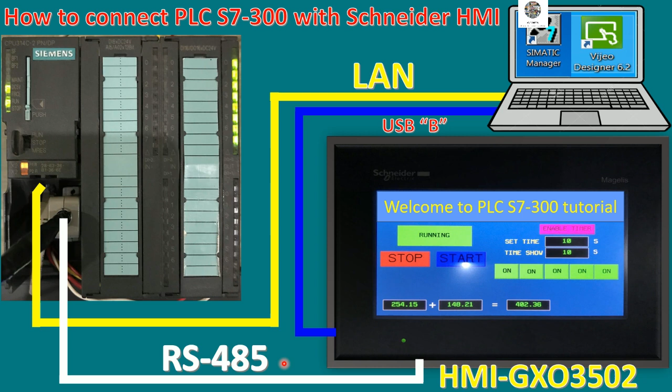Okay. And in this section also, I will use Simatic Manager for the PLC project and Vijeo Designer version 6.2 to create the project for the HMI. Okay. So before going to create the sample project for test, I would like to explain how to assign the pins for the PLC and for the HMI by using RS485 for communication. Okay, so let's go.

So here is the PLC part. We will use the male RS485 connector, and we use a resistance connected from pin number 6, 390 ohm, in series with pin number 8 with the resistance 110 ohms, and we will connect pin number 5 in parallel with pin number 8 with a resistance of 390 ohms also.

And for the HMI connection side, we can connect pin number 6 with number 7. We can weld them, yes. Number 4 with number 8. Number 1 connects with a resistance in parallel, or connects with pin number 2 with the resistance 110 ohms.

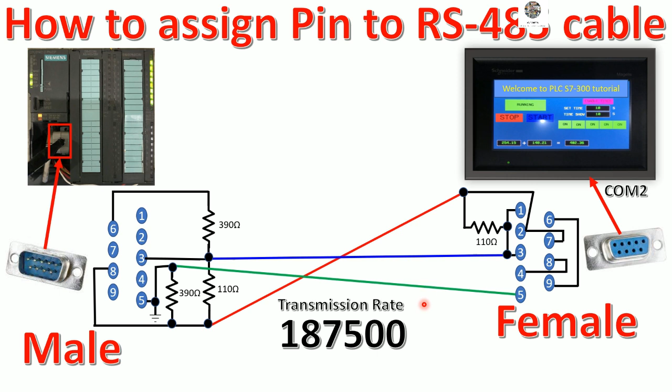So this is the main objective of this video, because we need to know how to wire the connection between PLC and HMI, otherwise we cannot test. Okay, so everyone can follow this drawing. For the resistance, it is not fixed at 390 ohm or 110 ohm. We can use similar resistances, so we can test also.

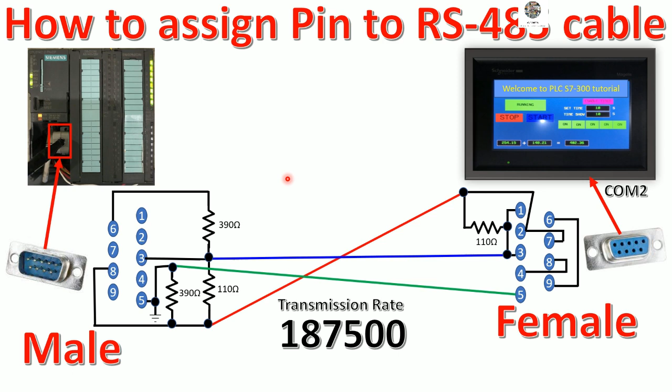So now let's go to our software to create the new project to test with the data from the HMI and PLC. Okay, so let's go. We will use Simatic Manager and Vijeo Designer that I already installed on my PC. So I will create the new project, S7-300 connect with Schneider HMI.

Okay, so first we will create the new project in Simatic Manager. So open Simatic Manager. Right now I use version 5.6. Okay, so create the new project. I will name the project Schneider HMI and browse to find the folder that we already created on the desktop. So here, and then click OK.

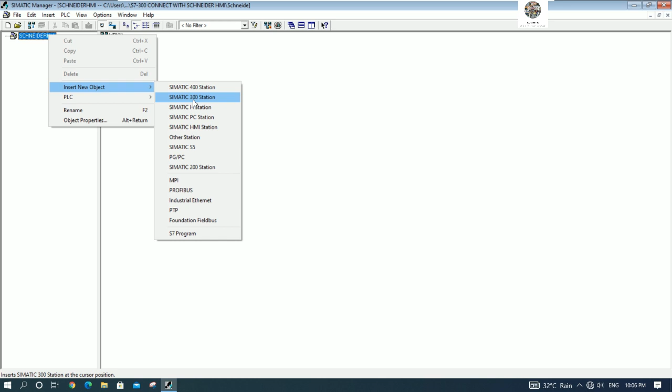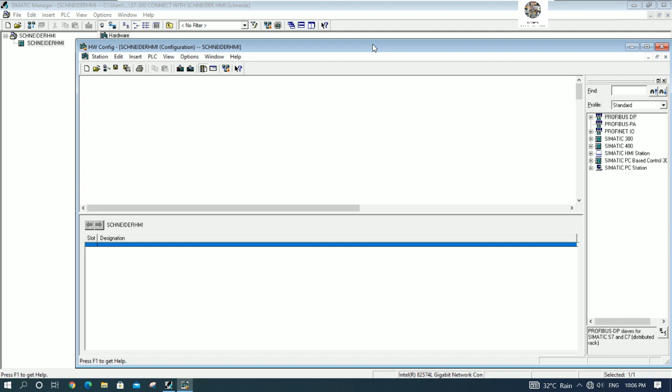And we will insert the hardware configuration for the CPU. In my slide, I will use the CPU 314C-2 PN/DP. It has two Profinet ports and one port for Profibus. So we can insert the Simatic 300 station. Okay, Schneider HMI. And then we can insert the rack for Simatic S7-300. So I will create the rack.

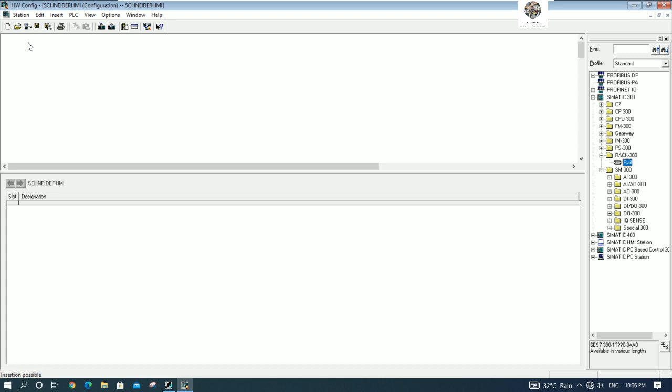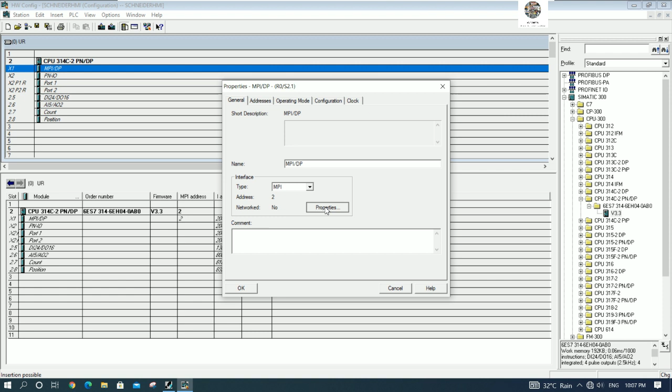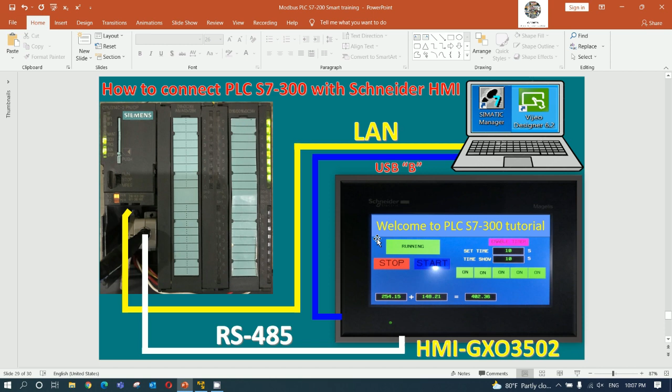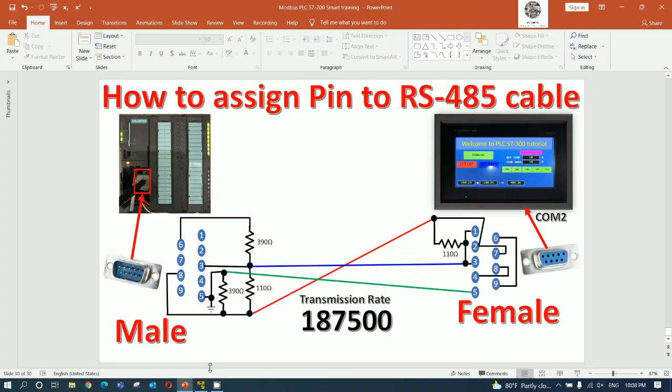And then we will insert the CPU to match our hardware. So 314C-2 PN/DP version 3.3. Okay. So this is the IP address of the CPU. So click OK. And here we must use MPI because we connect with the HMI. Properties. Let's see here. 187.5 kbps. It is the transmission rate that I already explained in the slide. So we need to choose the transmission rate the same as the PLC port.

So this is the address. It will be created automatically. Anyway, we can change the address here also. For example, we can change it to start from I0. So it will start from I0.0. And for the output, we can also change to 0.0. So it will start from I0.0 until 2.7 and output Q0.0 until 1.7.

And then save and compile the project, and we need to download the project to the PLC, right? Download the hardware configuration. So I will connect the LAN cable from my PC to the PLC, and then you can check the IP address here, 192.168.0.1. So let's put the IP address of our computer. Maybe I put it already, right? Let's check.

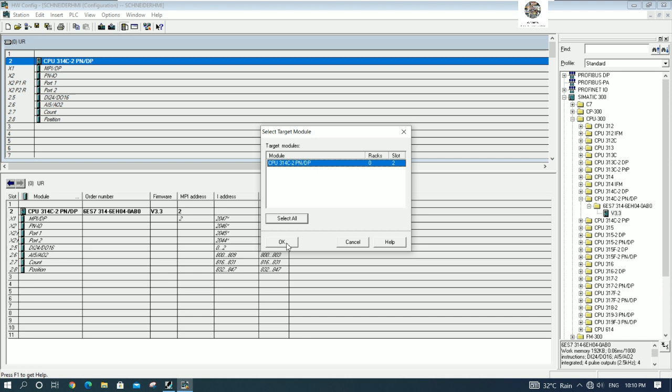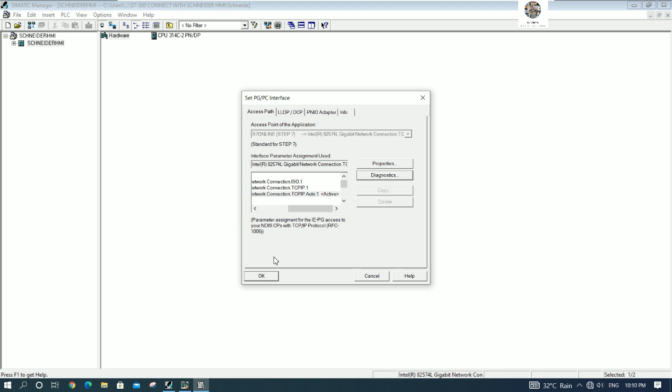So before download, we can go to Set PG/PC Interface. So make sure we select the connection here, and then we can test. Okay, it works. And then let's go to download. So it will find the CPU automatically, scan between PC and CPU.

So wait a moment for scanning the address of CPU, and it will automatically detect when the PC detects the PLC. Okay, so right now it detects one CPU that has IP address 192.168.0.1. So click View to view the status of the CPU, yes, and then click OK to download.

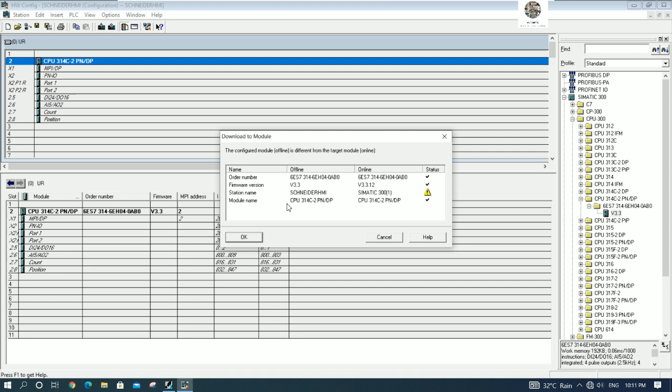Click OK to confirm, and OK one more time to stop the CPU. And right now the CPU is stopped and download is complete, so we click yes to restart the CPU, and the CPU is running right now. And then we can create the sample logic to test with our HMI.

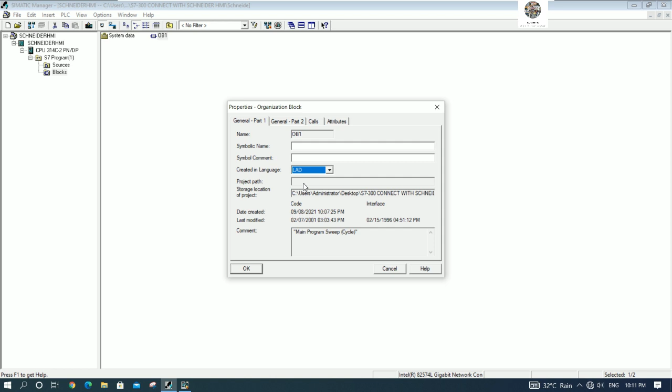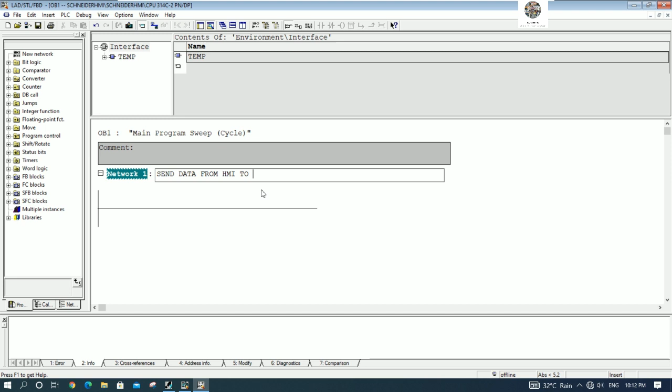So I will go to OB1, I will choose ladder, okay, so we can comment, send data from HMI to PLC. So we can create the push button stop, push button start, and output.

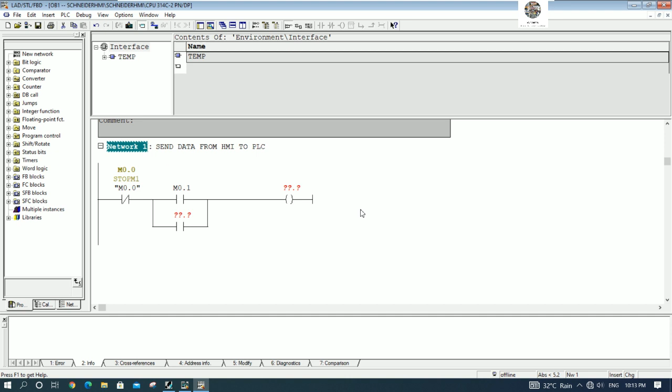Yes, and here I will use M0.0, edit symbol, example stop M1, yes, M0.1, example start M1.

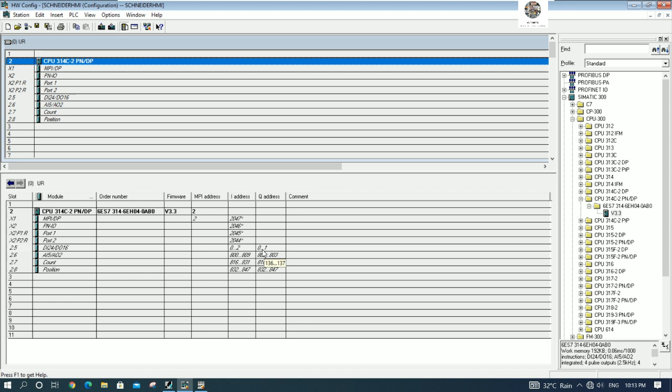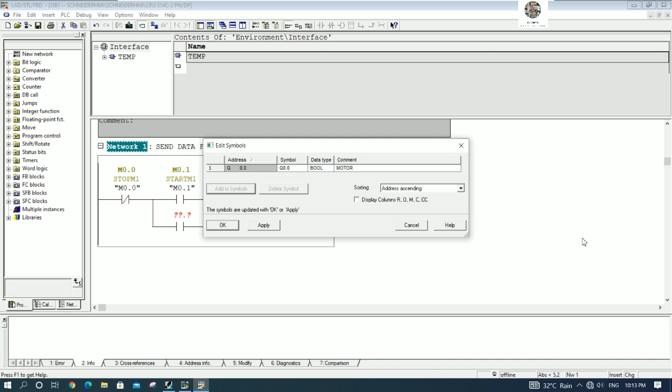And I will turn on the output. So output we already changed from Q0.0, Q0.0, so relay 1, or motor 1. Okay, and I will hold signal by Q0.0.

So we can save the project and then download to the PLC, and we can go online. Okay, so we can go to Vijeo Designer to create the HMI and then download, and we will test with the PLC. So let's go to Vijeo Designer. So double click to open.

Okay, so we will create a new project. The project name I will put PLC S7-300 connection. So we can copy from here and paste,

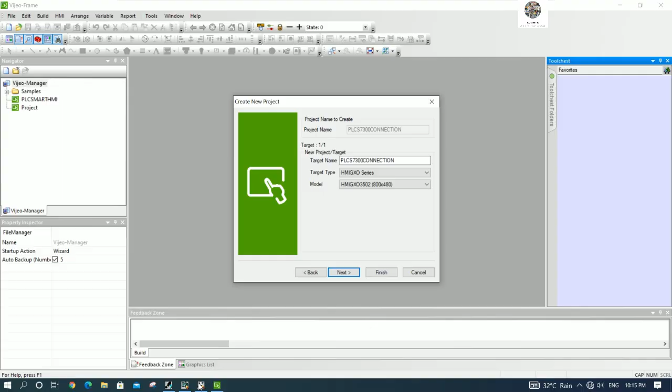and we will choose the correct model of HMI. Yes, there are many models, so I will use HMI GXO and choose GXO3502, the same as our HMI. Yes, so click next again, and add the driver of PLC.

So I will choose Siemens AG and choose the Simatic S7 MPI/PPI. So in the previous video we learned already about S7-200 series. So right now I will use S7-300/400 series. Okay, and then I will change the background of screen to this color. Yes,

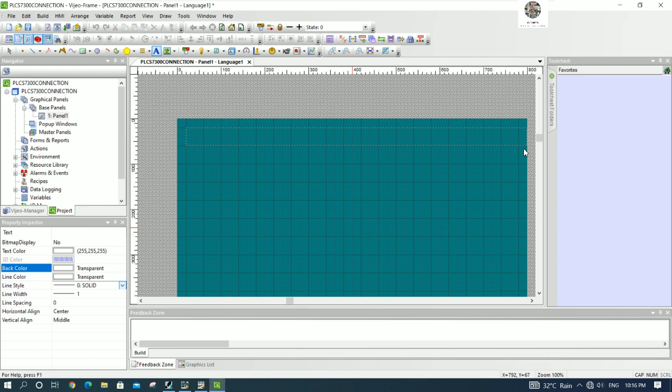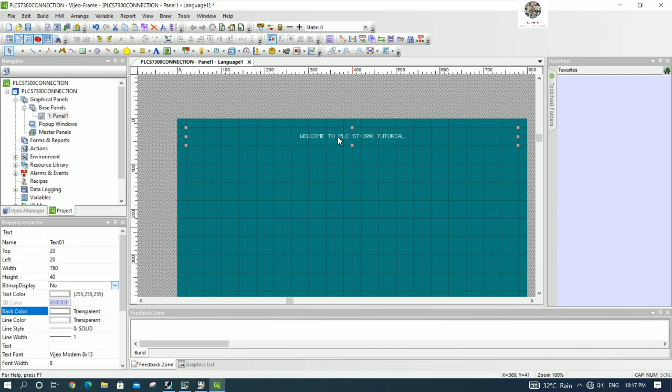and then I will put the text. Okay, welcome to PLC S7-300 tutorial. Okay, then I will use the font size to be this size. I will use bold. Yes.

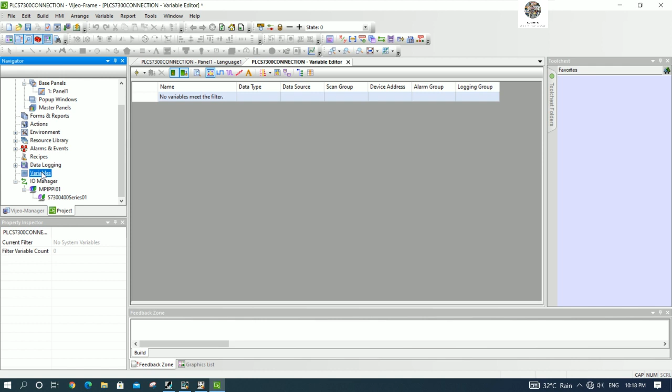And we will create the variables to connect with the PLC, right? So M0.0 is stop, M0.1 is start. So we can use variable, create the new variable and boolean. Example, stop relay 1. And this is a driver. Yes, so we can choose, and here we can choose M0.0, it is stop, right?

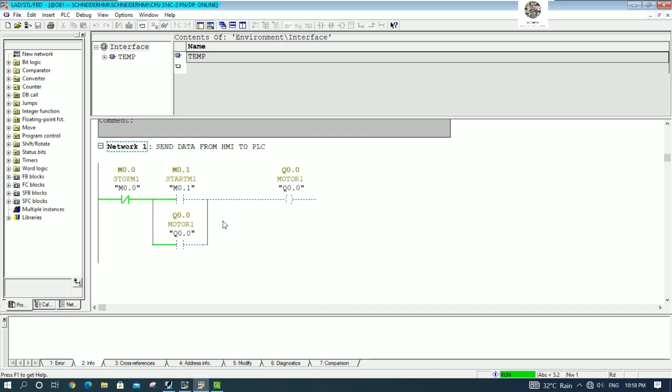And insert one more for start relay 1. M0.1. Yes, it is like this, the same as the address of PLC, right? And one more boolean for relay 1 status or motor 1 status, right? So I will put relay 1 status. So Q0.0, yes.

And then don't forget to check the transmission rate, yes, it's correct. And we'll connect to COM port 2, RS485 for serial interface. You can save the project and then go to the screen and configure the screen, right? So I will use switch.

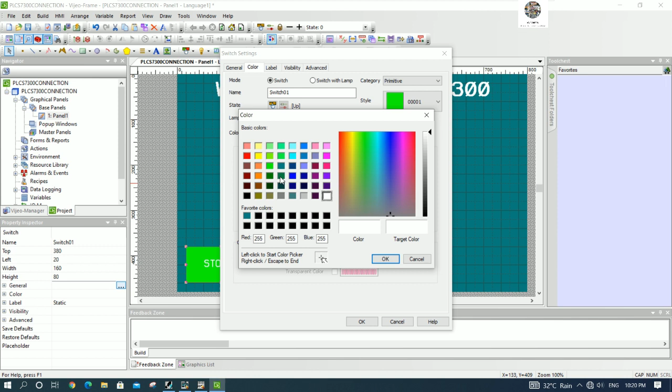Okay, I will put the stop button, stop R1. Okay, stop R1. And I will change the text color to be black and change the color to be red to fill the button. Okay, stop R1.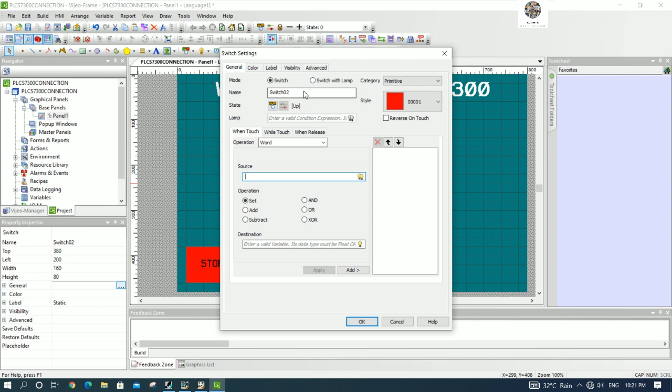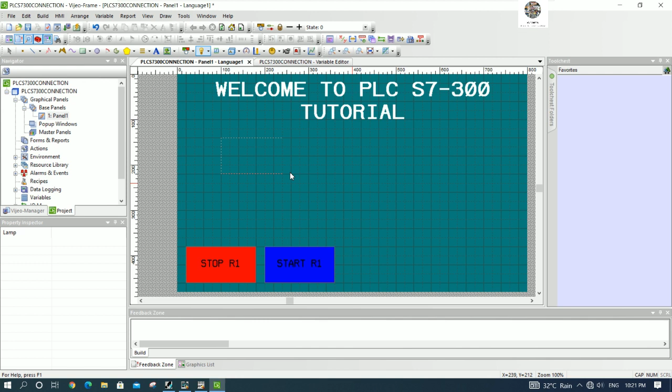And we have to copy to start R1. Okay, this one should be start R1. And then we will change the color to be blue. Yes. And we need to insert the relay number 1, right? So I will insert the relay number 1.

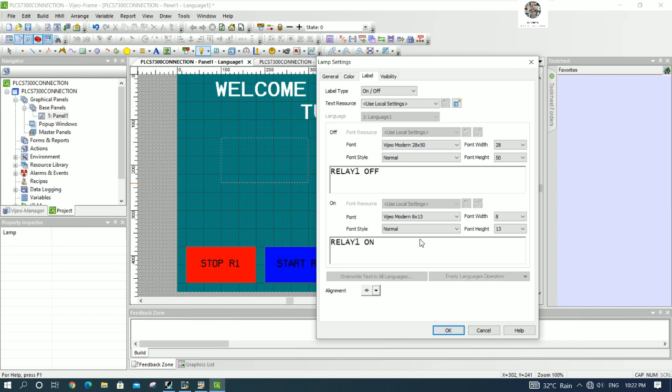Okay, we can use on off like this. So when the condition is off, I will write relay 1 off. And when it is on, I will put relay 1 on. And for the font size, we can use the font size. And then we can use the style like this. Yes.

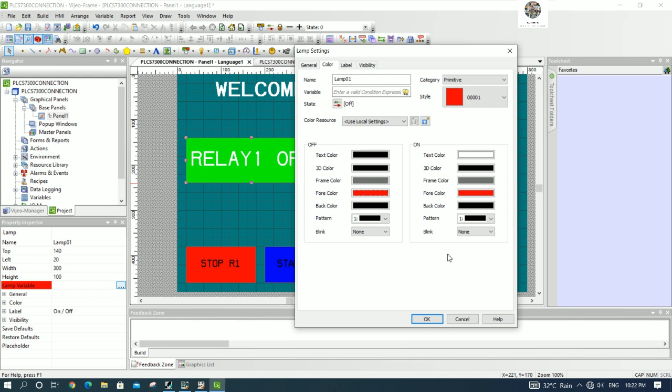Okay. So if we would like to turn on another relay, we can copy. So right click, copy, right click, paste. And then we can adjust the alignment. So I will change this one to be relay 2. This one should be stop relay 2, stop R2. This one start R2.

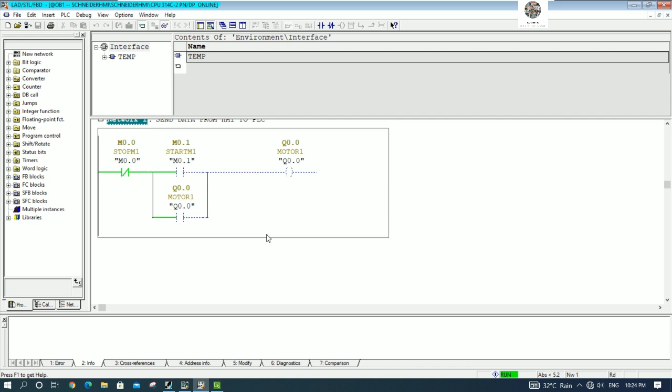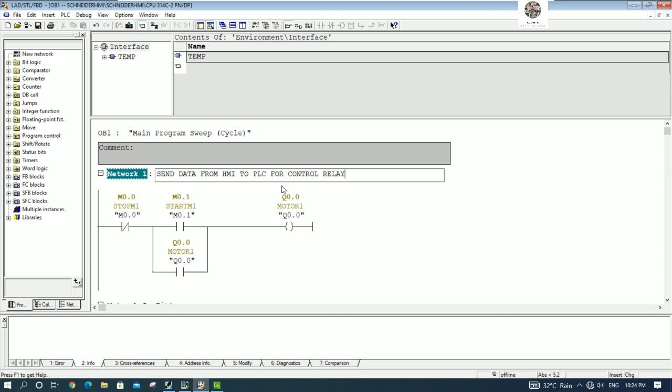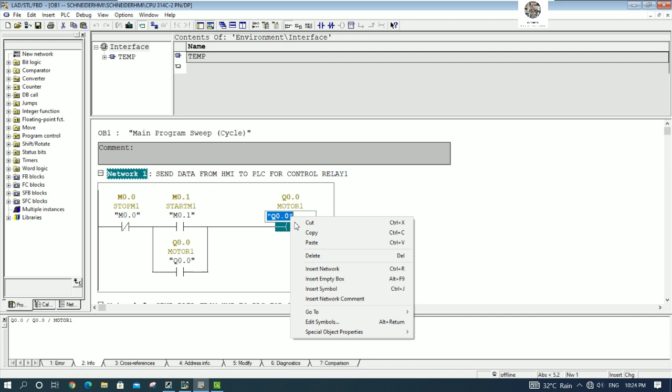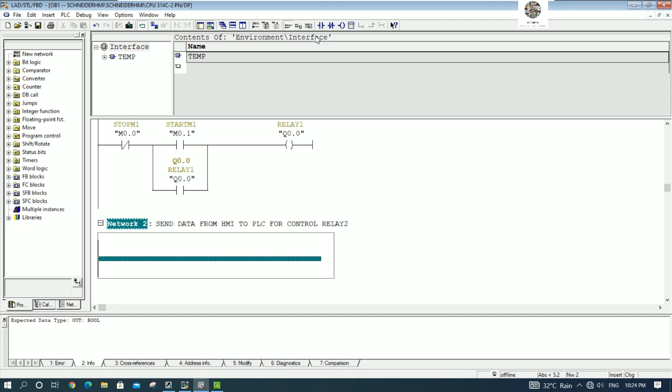Okay, so we need to create more for logic, right? So I will offline first and then insert the network. This one for control relay 1, and this one we can paste for control relay 2. I will change description this one to be relay 1. Okay, and then we can insert the push button stop, push button start, output, and parallel to hold the signal.

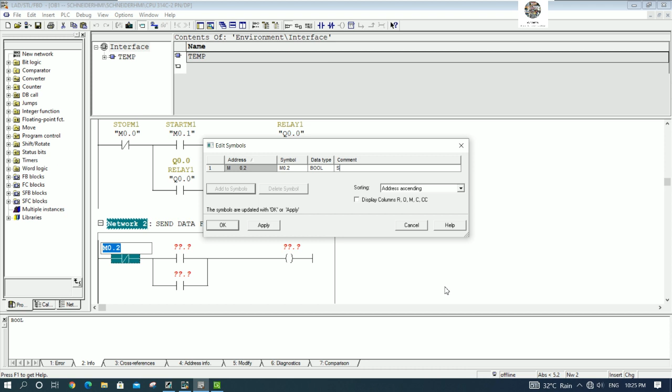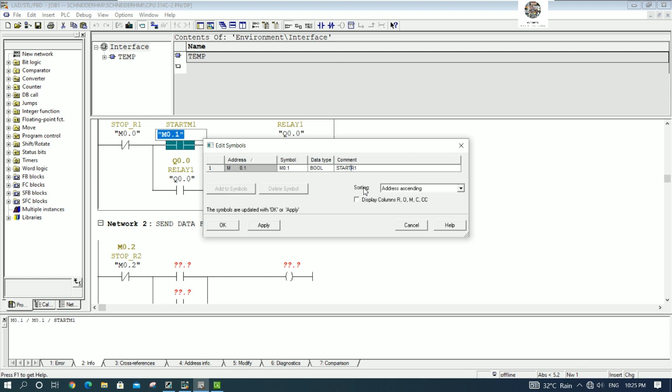Yes, and this one I will use M0.2. It is stop relay 2, right? Stop R2. This one I will change to stop R1. This one I will change to start R1. Okay, and this one should be M0.3, right? So start R2.

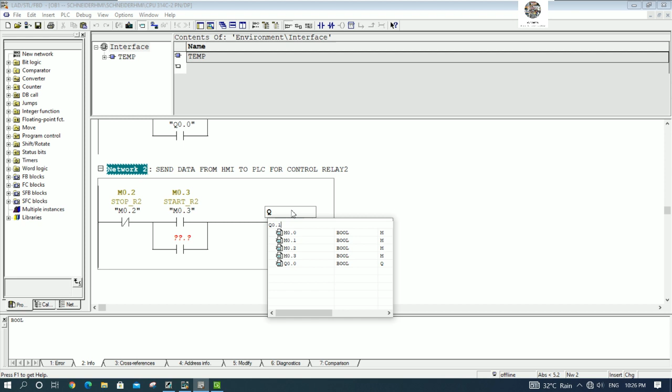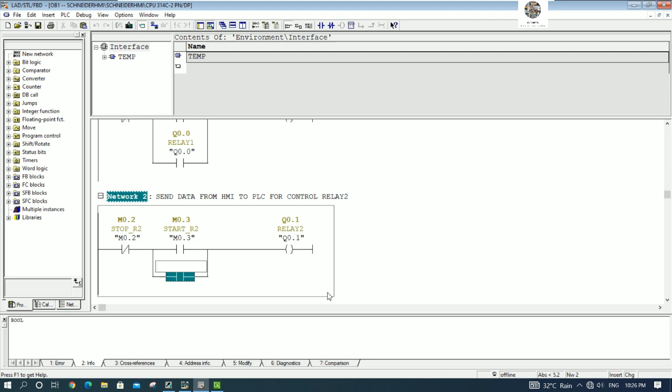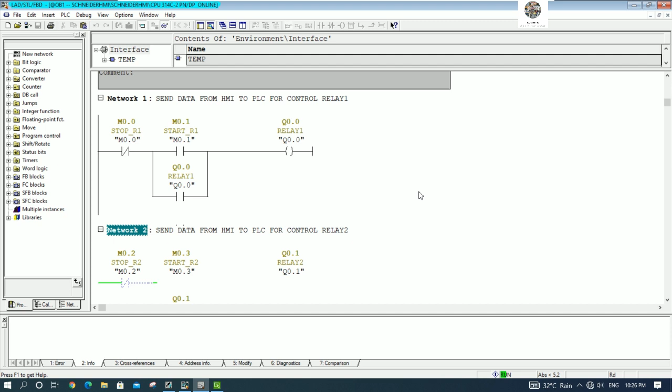And this one Q0.1. So relay 2, right? Okay, this one relay 2 also, so Q0.1. Okay, and then we can save the project and download to the PLC, and we can go online. And then we can go to create the HMI.

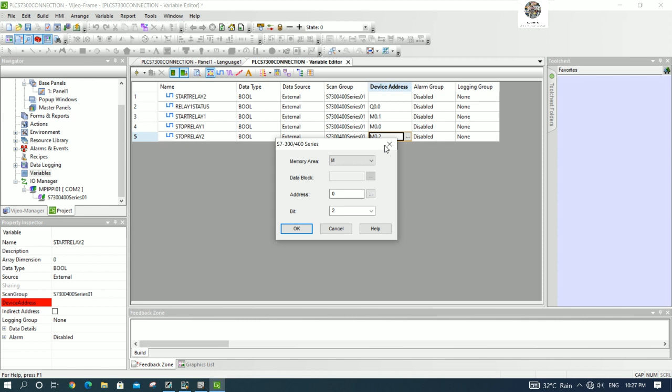Yes, so let's go to variables, insert the boolean. So this one should be stop relay 1, stop relay 2. So M0.2. Yes, this one. One more boolean. Start relay 2. M0.3. And one more for relay 2, right? So relay 2 status, Q0.1. Yes.

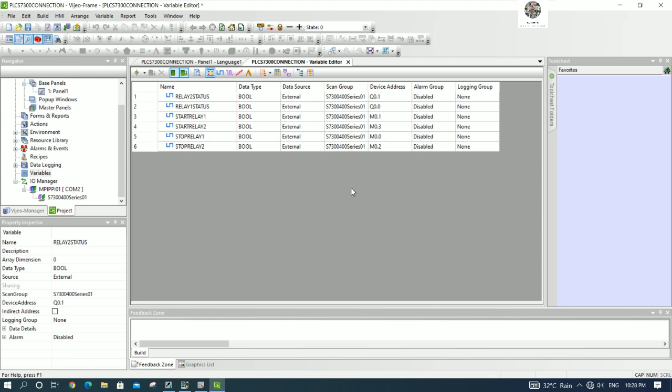And then let's go to screen and then configure the button and relay status one by one, right? Okay, first I will configure the stop button for relay 1. So double click, go to operation. I will use bit and use the momentary on. Destination I will choose stop for relay 1. This one double click, go to bit, momentary on, and choose the start relay 1, and this one go to the variable and choose the relay 1 status.

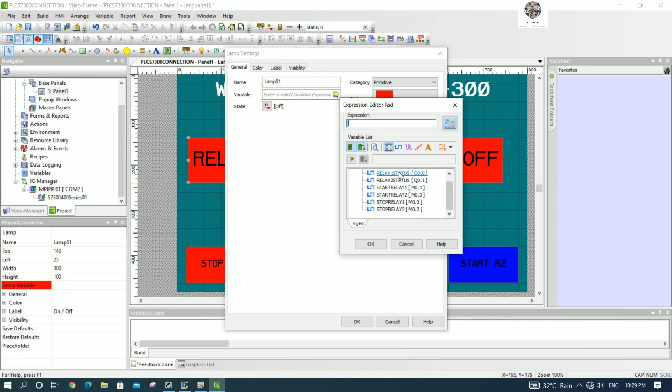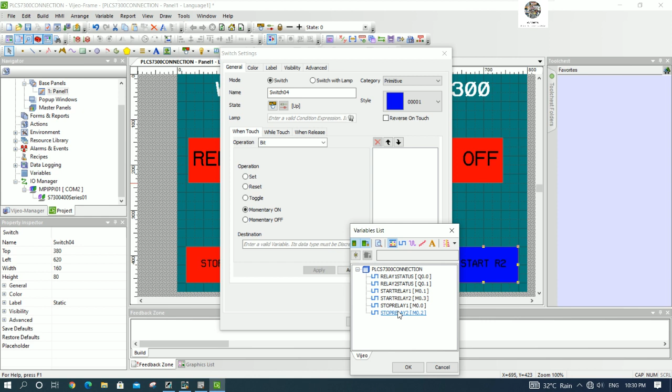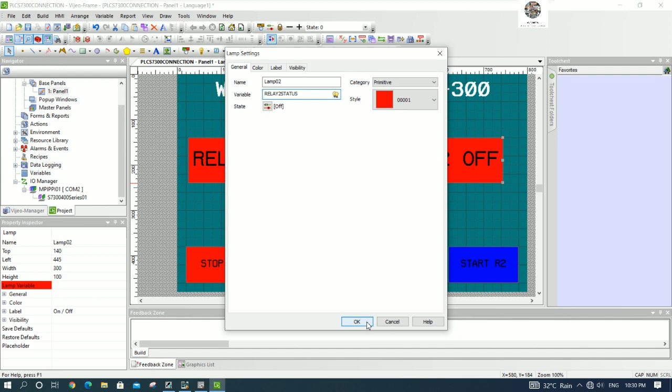Okay, and for the label, we already put the text for the label, and for button stop relay number 2 can go to bit and choose momentary on also, stop relay 2, click OK. Start R2, go to bit, momentary on, choose the start relay 2, OK, and relay 2 status, go to general variable, go to relay 2 status, and click OK. Okay, for this one we already changed for on off. So when off, condition red, when on, condition green.

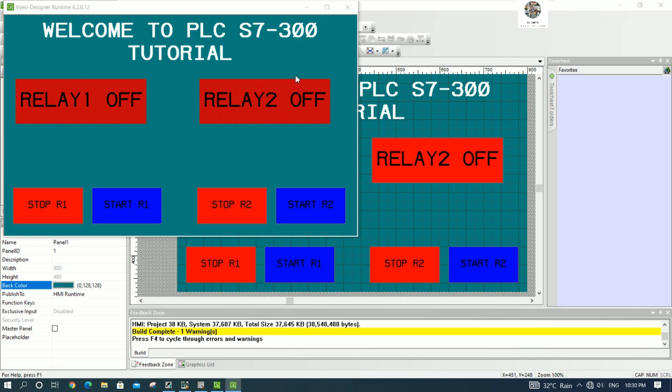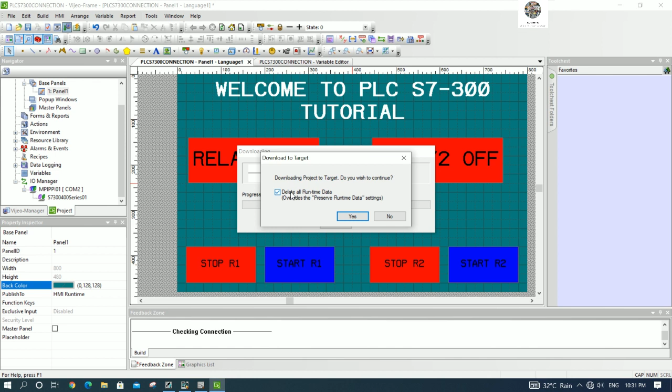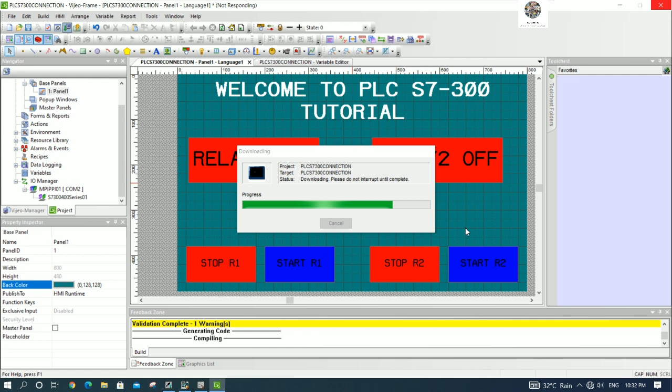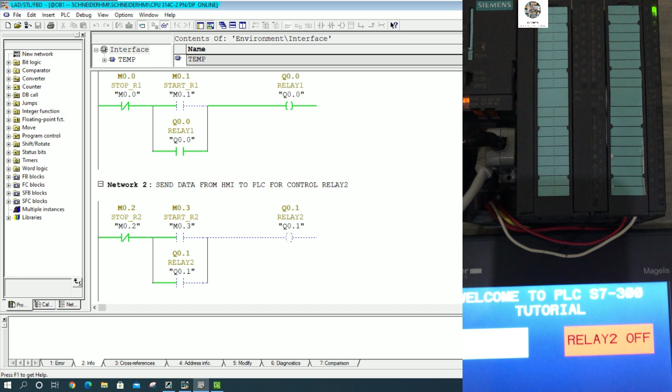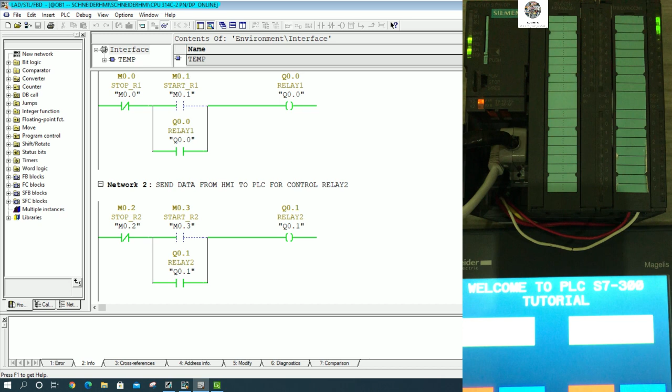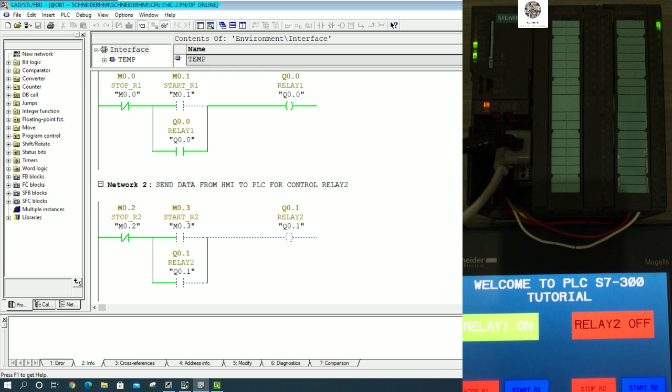Okay, finish. So we can go to the project of PLC and we can test with the HMI together. Okay, let's see the status of PLC is turned off. So if I push start button, yes, the PLC is turned on, and the status shows relay on. So if I push stop, yes, stop, start again, and the HMI will show the relay 1 and relay 2 is turned on. Yes. So communication between this cable and HMI is working perfectly. Yes. You can stop, start again. Yes, so it worked perfectly.

So this is just an example about how to link the data or connect the data from PLC S7-300 to HMI Schneider by using the RS485 cable.